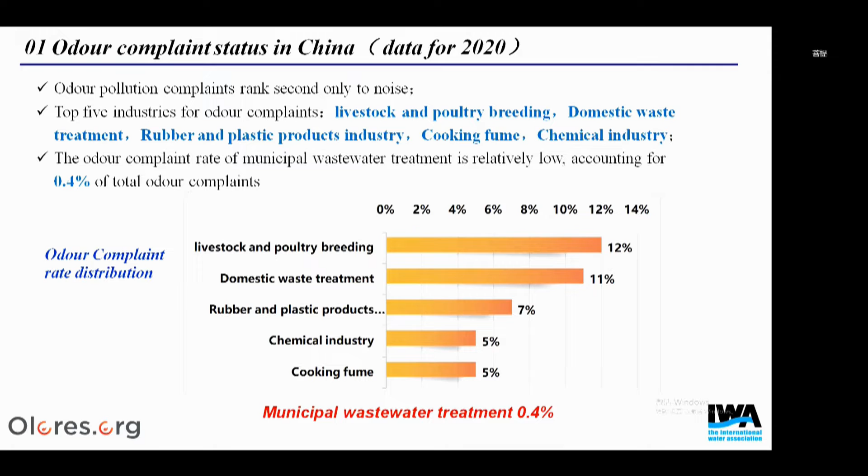The top 5 sources for odor complaints are livestock breeding, domestic waste treatment, rubber and plastic products industry, cooking fume, and chemical industry. The complaints from municipal wastewater treatment are relatively low, accounting for only 0.4%.

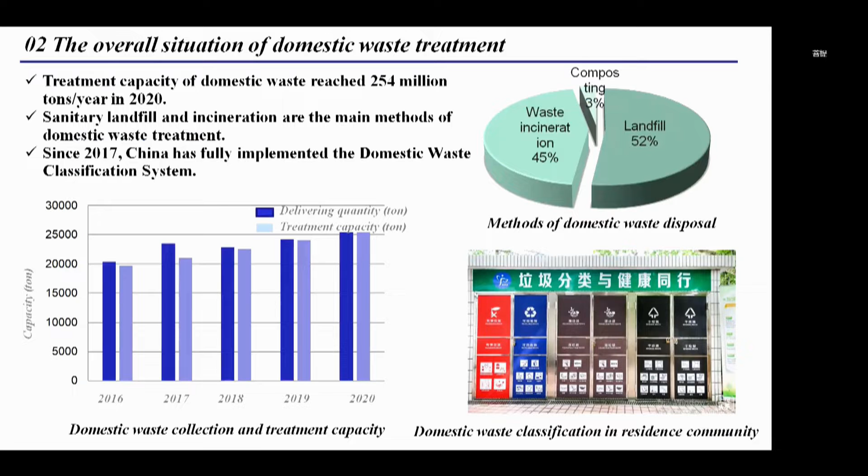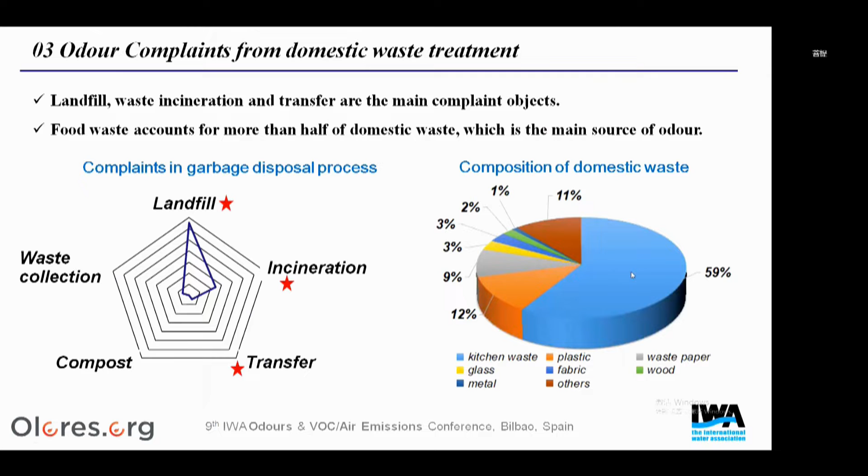In 2020, the treatment capacity of domestic waste reached 254 million tons, and sanitary landfill and incineration are the main methods of domestic waste treatment. Landfill, waste incineration, and garbage transfer are the main complaint objects. Food waste is the main component of the domestic waste, which is the main source of odor.

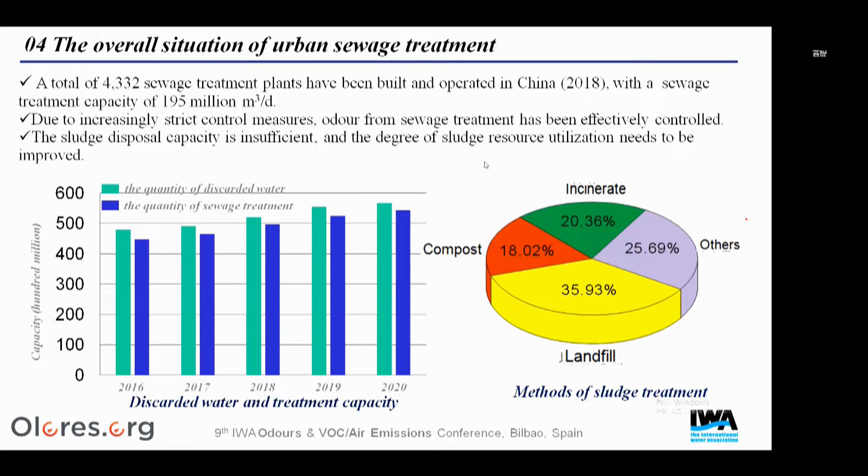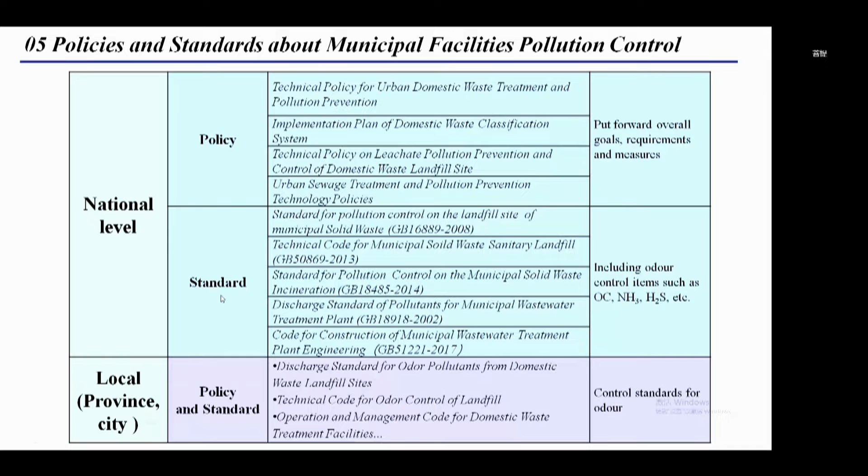By 2018, more than 4,000 sewage treatment plants had been built and operated in China, with a treatment capacity of 195 million cubic meters per day. But the problem is the sludge disposal capacity is insufficient, and the degree of sludge resource utilization needs to be improved. In order to minimize the impact of odor gases from municipal facilities, the state has promulgated a series of policies and standards. Local governments can formulate more stringent local standards.

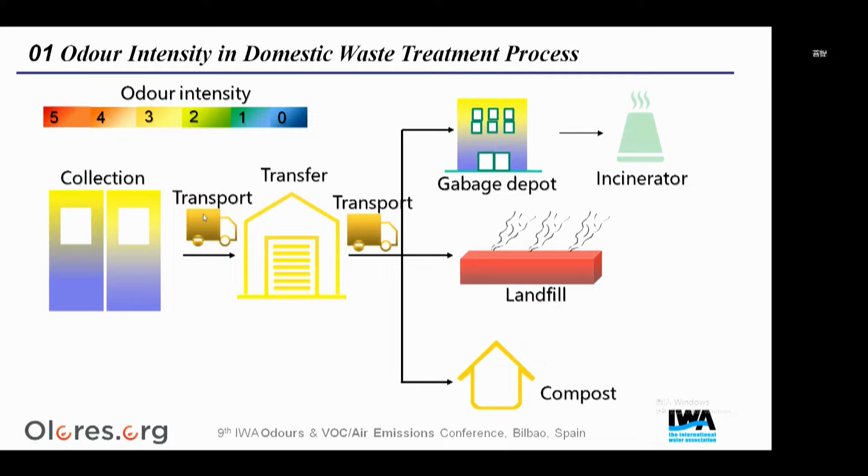The second part is about the chemical composition of odorous gases. First, let's take a look at the odor intensity of each link during domestic waste treatment. From the color change, we can see the odor intensity of landfill is the highest, followed by garbage transportation. The second is about the chemical composition of odorous gases. The first case is from a typical landfill in North China.

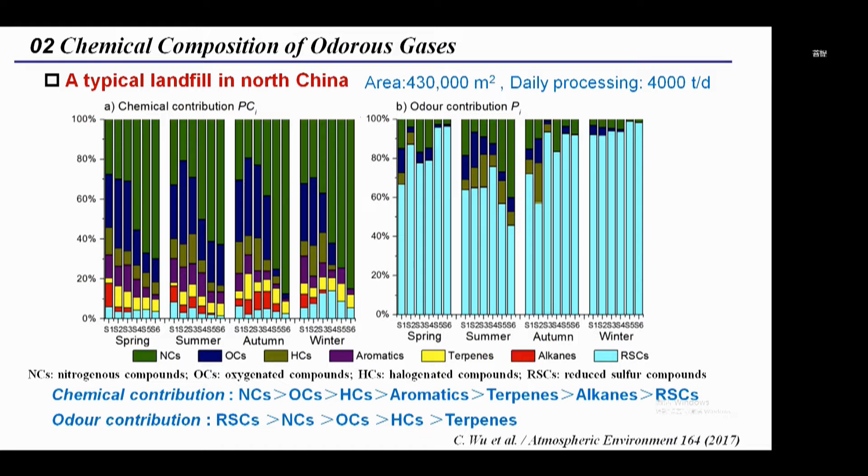As to the odor contribution based on OAV calculation, the trend is very different from that of the chemical contribution. Reduced sulfur compounds contribute the most, especially in winter. They contributed over 90% of the odorants, while in summer, nitrogen compounds contributed significantly because of the increase in trimethylamine and ammonia concentration. The second case is from a food waste disposal plant in North China. Odor samples were collected at 4 sites.

Generally, the chemical concentration at the outlet is the highest, followed by conveyor opening. The concentration at the residue tank is the lowest. In addition, the number and concentration of detected odorants increased in summer and autumn.

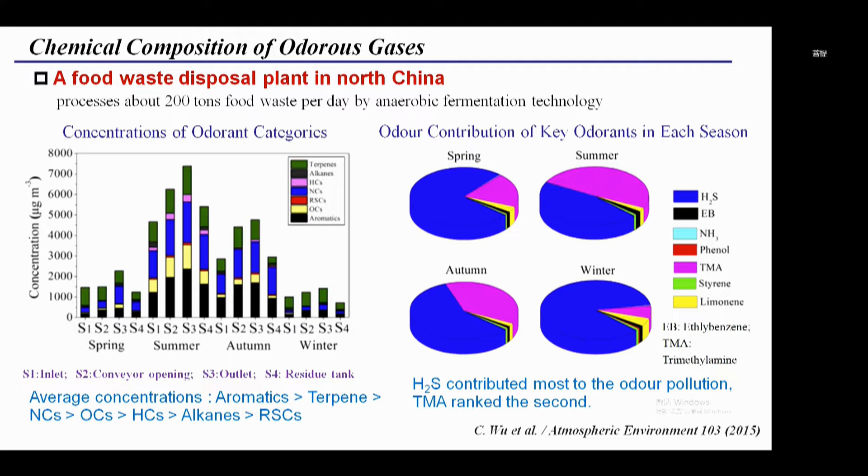This is the odor contribution of key odorants. We can see hydrogen sulfide was the largest contributor to odor pollution. Trimethylamine ranked the second, especially in summer. The contribution of trimethylamine increased significantly.

The third case is from a municipal solid waste plant in South China. The main disposal methods include landfilling, anaerobic fermentation, and ecomechanical biological treatment. Landfilling is the main treatment method. Only a small part of municipal solid waste is treated by anaerobic fermentation and EMBT.

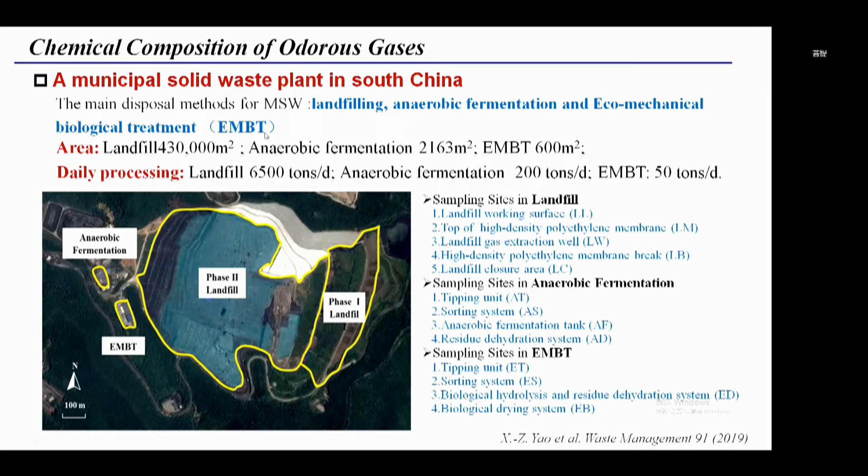Figure A shows the cumulative emission concentration of volatile compounds. Among the sampling sites, the highest volatile compounds concentration occurred at LB site in the landfilling area, which represents HDPE membrane break, followed by LW site, which represents landfill gas extraction well. The lowest chemical concentration was during EMBT.

Figure B shows the percentage of each volatile compound. We can see sulfur compounds dominated in all 3 disposal methods. The highest abundance of sulfur compounds was detected in the EMBT. Secondly is the oxygen compounds.

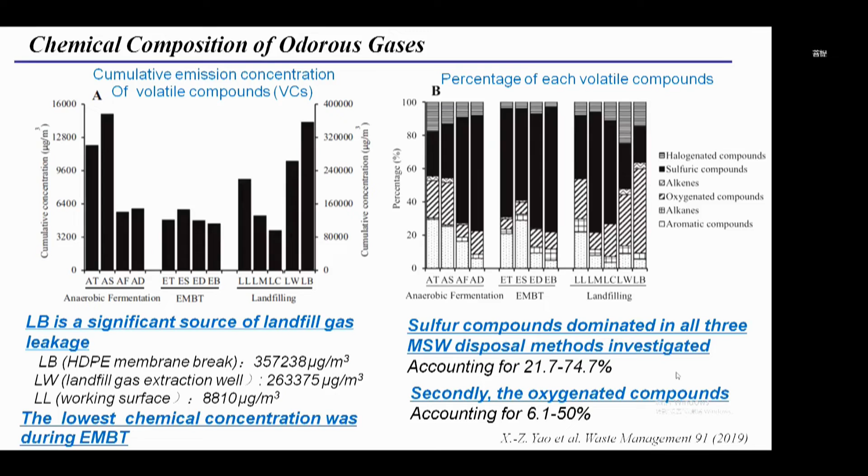This is the odor intensity of sewage treatment. We can see the odor intensity at the coarse screen and fine screen is the highest, reaching grade 5, followed by grit chamber unit and sludge digestion unit, reaching grade 4.

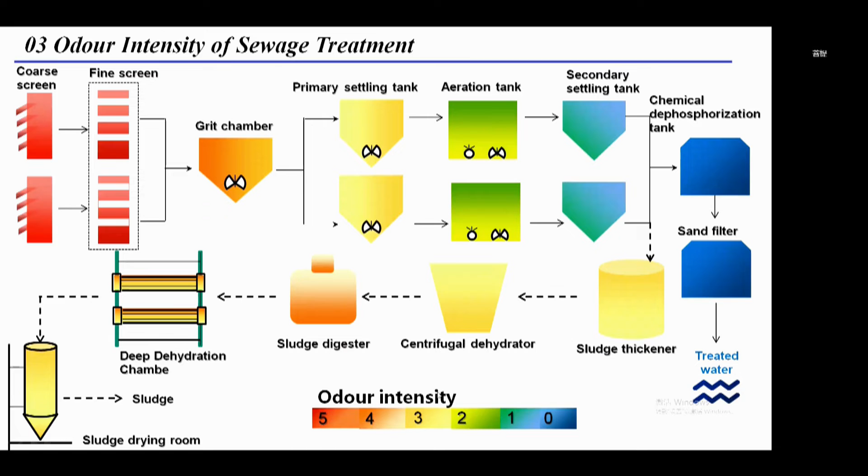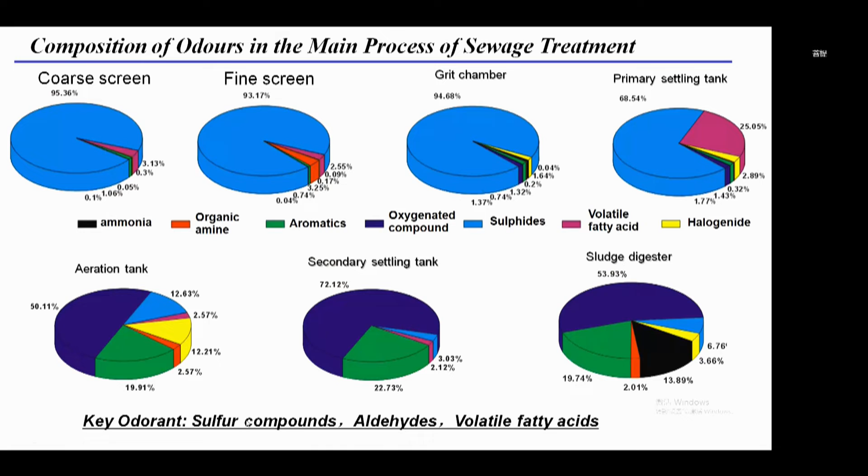These pie charts show the chemical composition of odors in the main process of sewage treatment. In the pre-treatment stage, sulfide, especially hydrogen sulfide, is the predominant substance. In the biological treatment, oxygen compounds are the main detected substance. The sludge treatment stage mainly includes oxygen compounds, aromatic hydrocarbons, and ammonia. The key odorants are sulfur compounds, aldehydes, and volatile fatty acids.

The third part is the impact assessment of odor nuisance from municipal facilities. The traditional management process for handling odor complaints is as follows. Firstly, the Environmental Supervision Department conducts on-site inspection to confirm the existence of odor pollution. The next step is sample collection and pollutants analysis to judge whether the pollutants exceed relevant standards. Finally, ordering enterprises involved to rectify if they exceed the standards.

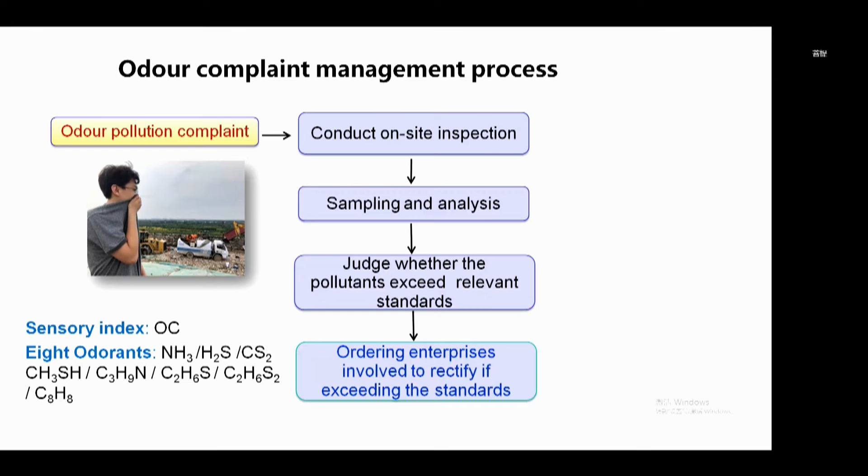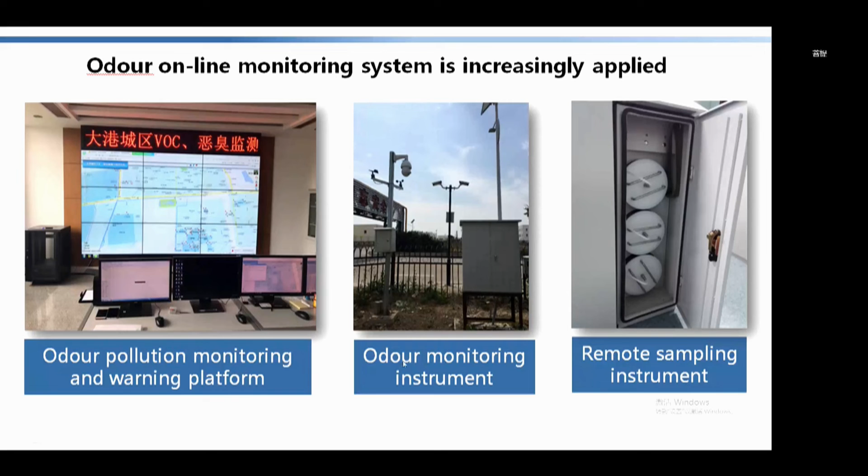We can see the whole process is time-consuming. Furthermore, this method often fails to grasp the actual odor emission state. Therefore, in recent years, many industries, manufacturers and industrial parks have applied odor online monitoring systems. The online monitoring system can detect the odor problem in time and give early warning and can also start remote sampling.

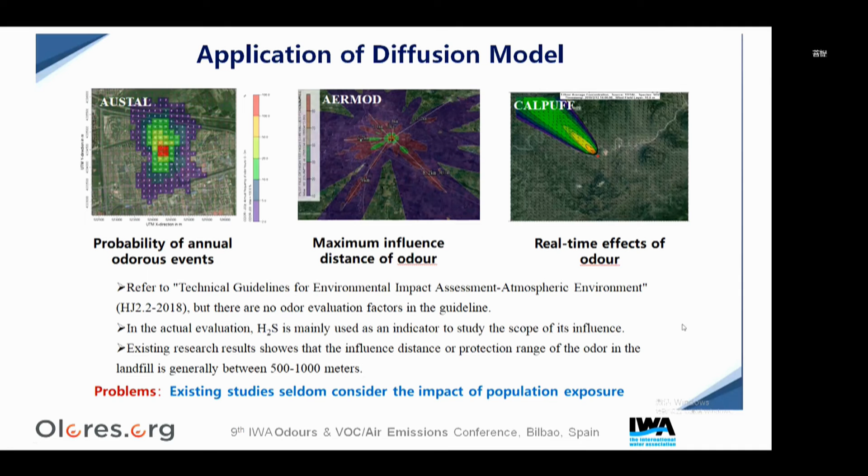Atmospheric diffusion models are also often used in odor impact assessment. However, there is no odor evaluation factor in China's current environmental impact assessment guideline. In the actual evaluation, hydrogen sulfide is mainly used as an indicator to study the scope of odor influence. The problem is existing studies seldom consider the impact of population exposure.

In recent years, we have done some research on the odor impact of population exposure. Here are two examples. One is about the odor influence of landfill height on residents at different floors of nearby buildings. Another example is odor exposure response relationship for wastewater treatment plants.

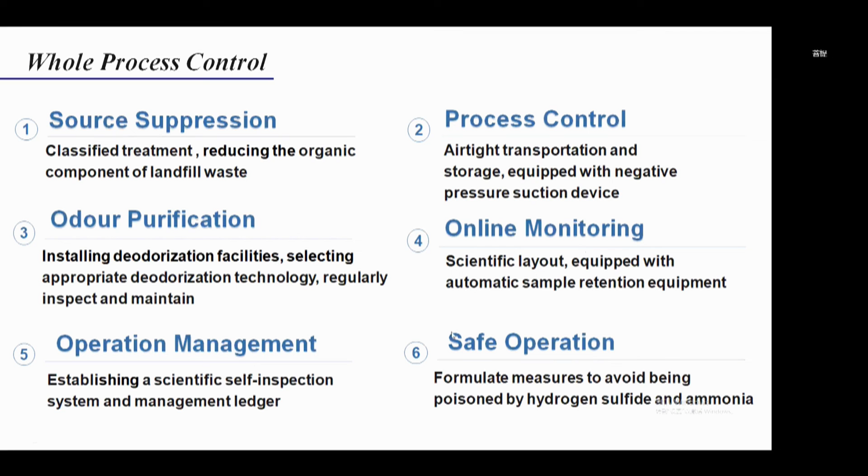The last part is odor pollution control measures in China. The state advocates the whole process control strategy, including source suppression, process control, odor purification, online monitoring, operation management, and safe operation. My presentation is over.